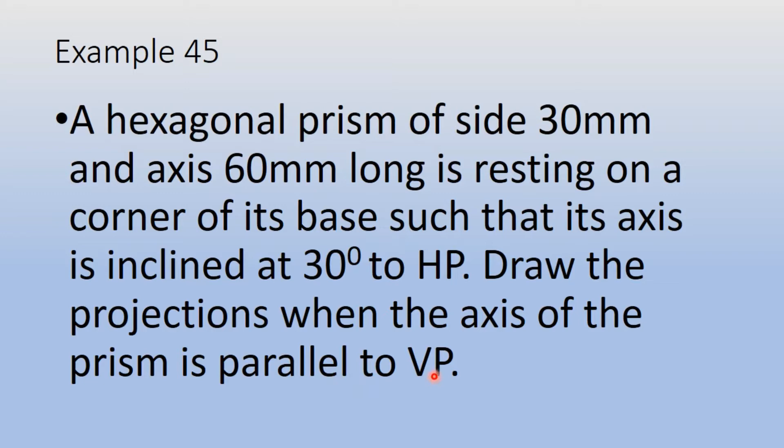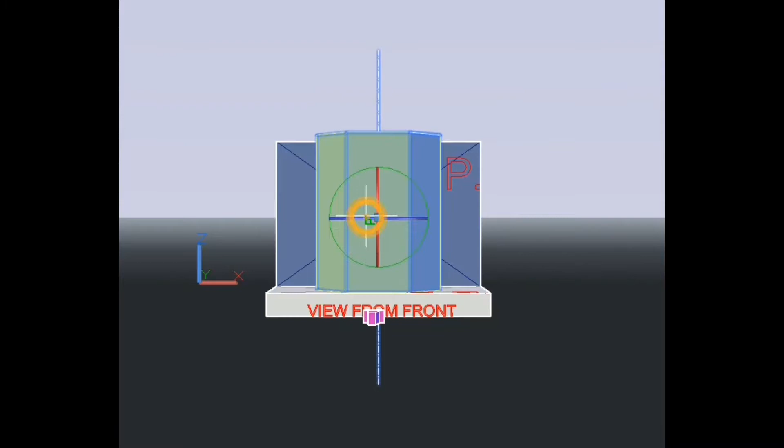So from the previous problem, you see that the hexagonal prism is directly resting on the HP. But here in our question, it is mentioned that it is resting on its corner. So now you can see that I am holding the corner of this hexagonal prism. Just wait a minute. Now you see here at the bottom, I am holding one corner. A corner is a point where two edges meet.

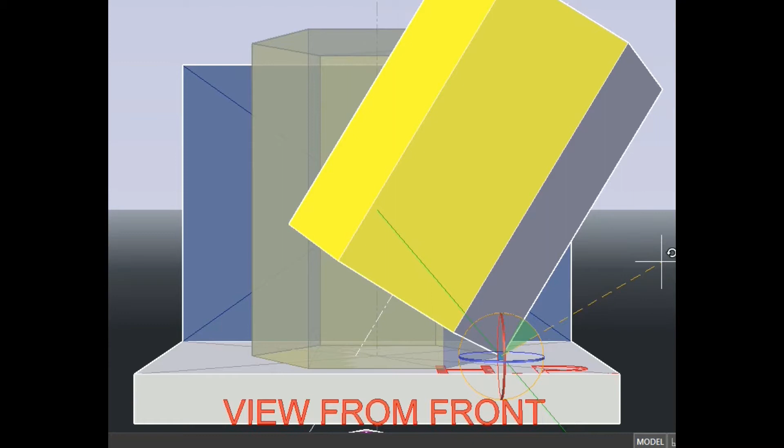So with this corner stationary, I will rotate the hexagonal prism. Now you see that the corner is resting on the HP, but I am just rotating the whole solid. But the corner is on the HP itself. So in any way, the axis is parallel to VP. So let us say this is the inclination angle given in the question. As it is given 30, I will make it somewhat more slope here. Just wait a minute.

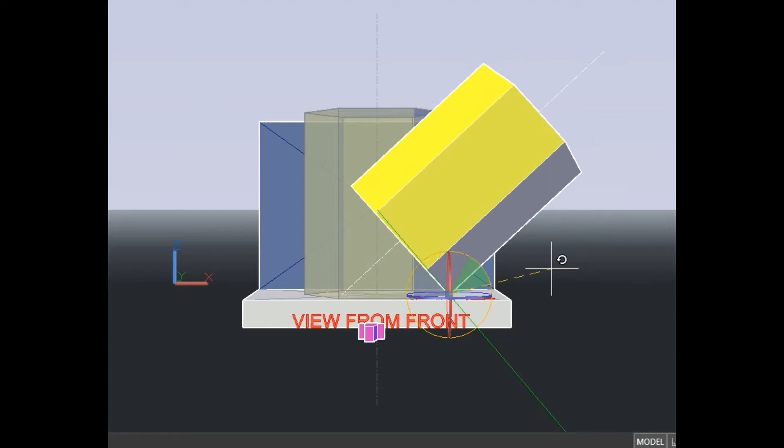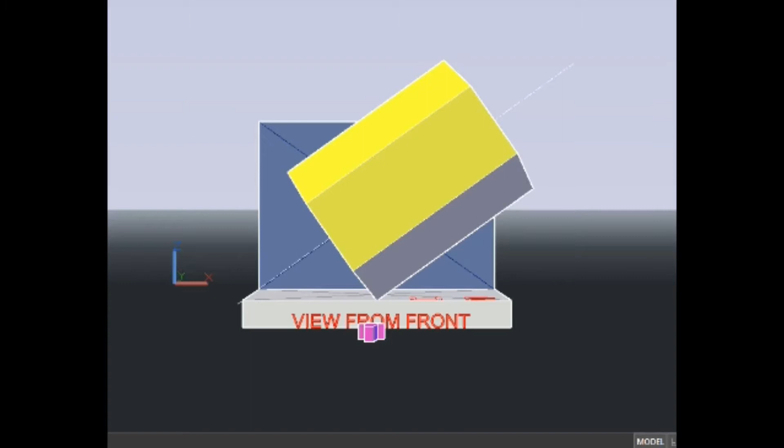So let us say this is the 30 degree angle, and now you can see that it is going beyond the first quadrant. I can bring that back to first quadrant. It's not required, but actually for understanding purpose. Now you see that in your front view there will be three rectangles which are visible. It's very easy, but they are inclined to the HP. And from the top view, you will find that there will be two hexagons, but one will be completely visible.

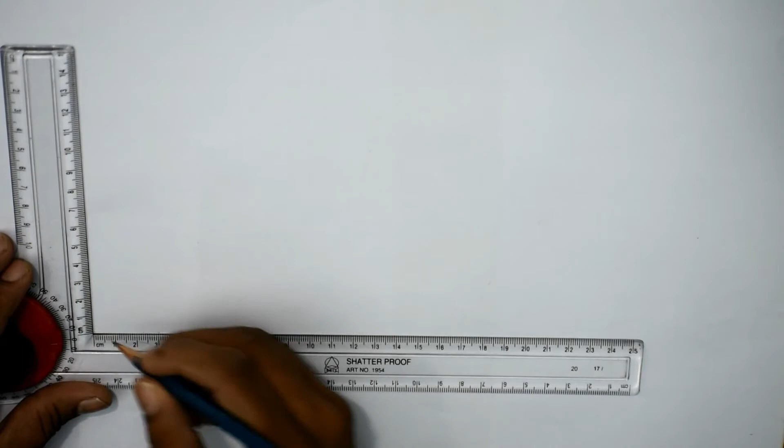So as we have seen that it is inclined to the horizontal plane, but we will first assume that it is resting on its base on HP. Which means that we will get a top view as hexagon. Now I will use 2H pencil here because this is not part of your solution. This is just our assumption to get the dimensions of the main diagram. This line will be very light.

If you don't understand this, you can draw the hexagon as we did in the question number 42 by using the protractor scale. But I recommend you use this because it's very time saving. There you go. We have got all the sides again with the 2H pencil.

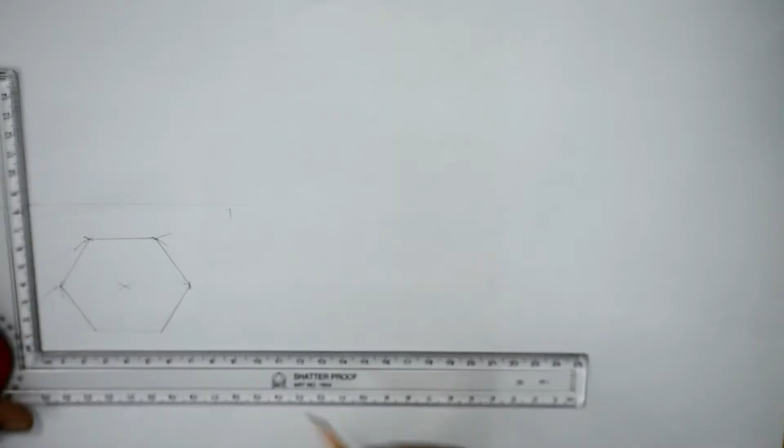So this completes our top view of assumed hexagonal prism. This is your xy plane, and I am projecting all the corners, also the axis line. In this question, it becomes very necessary to mark the points, corner numberings.

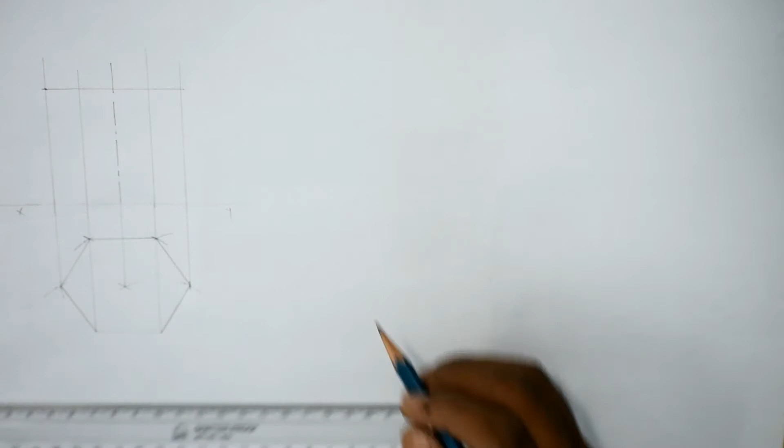So the axis height is 60. So this completes our front view and top view. As for the numbering, 1, you can take 2 here also, but I am taking 2, 3, 4, 5 and 6. So this is 1 dash, 2 dash, 3 dash, 4 dash, 5 dash, 6 dash.

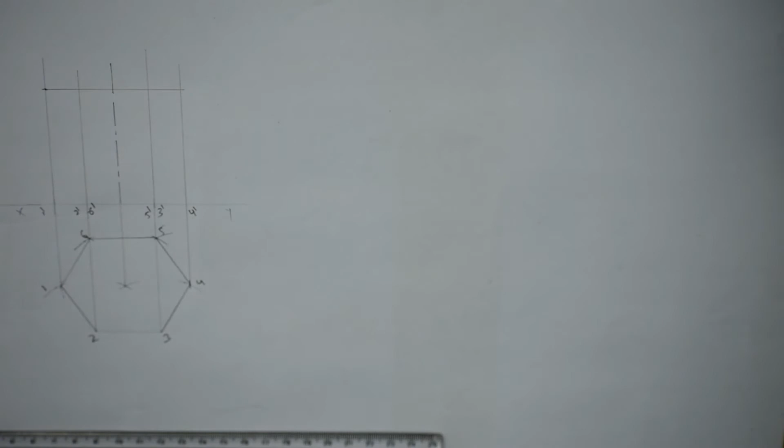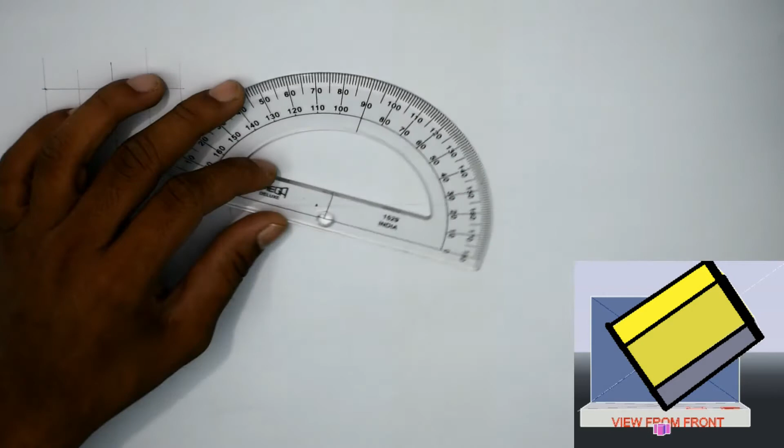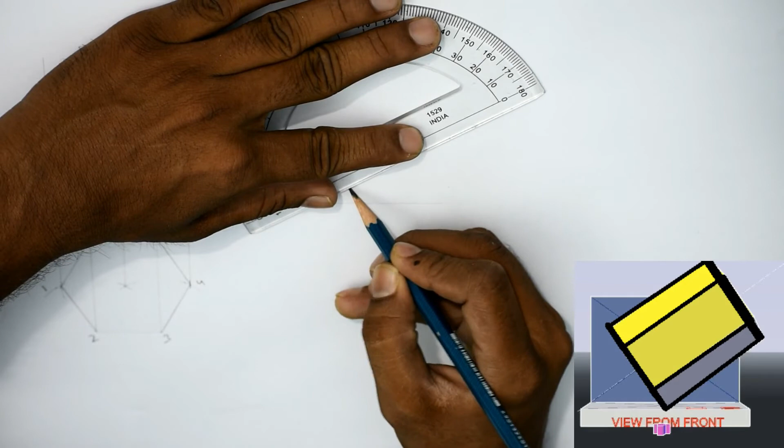Now we will come to our question. In this question, it is mentioned that the axis line is inclined at 30 degree to the horizontal plane. So I am marking one point here, somewhere here. Now I will take the angle of 30 degree. We'll just draw the axis line first. So our beautiful axis line is completed.

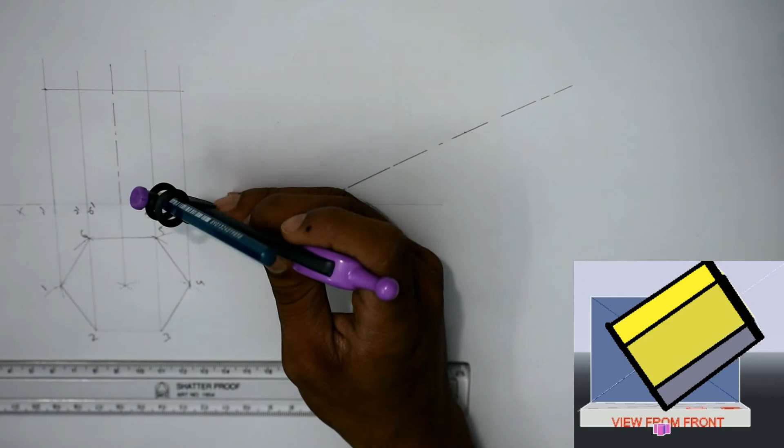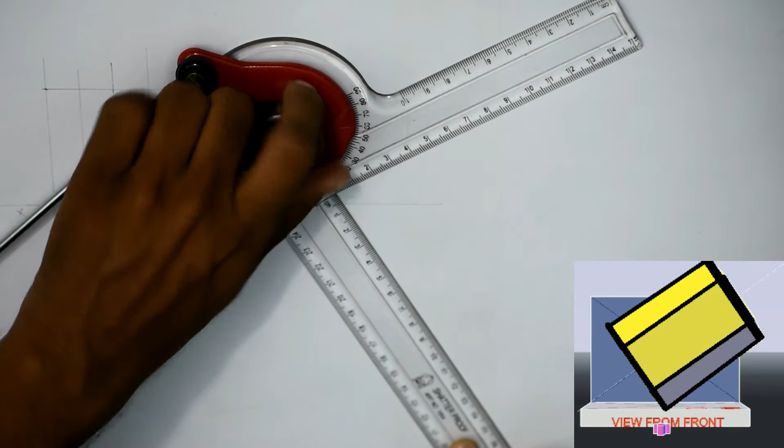Now I have to tilt this figure aligned with this axis. For that reason, as you can see here, you will get around 60. You can measure from here also, from this end to this end. Yes, it is 60. So our base is 60. So we have to make sure that it is aligned first. That is, the drafter is now making an angle of 30 degree with the HP, and now as we go along, we have to just adjust.

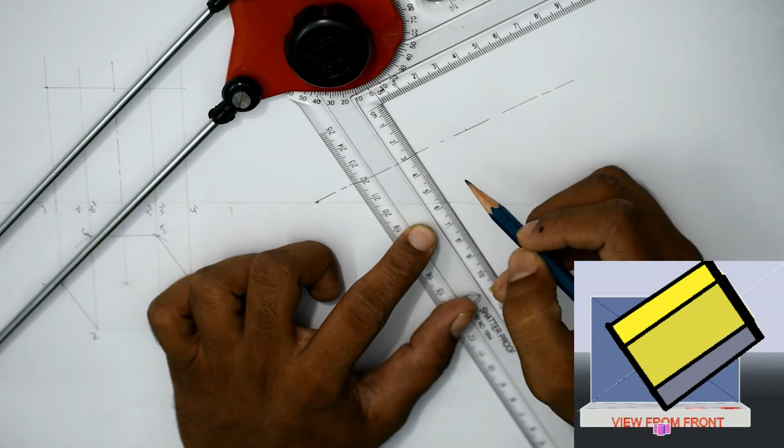If you get this line, you will see that almost your diagram will get finished. See that the 60 mm line is touching the horizontal plane and 30 mm line is touching the axis line, which means you will have 30 mm portion here, 30 mm portion here. Now I will take the HB pencil itself, because this is my final answer, final front view, and I am taking 60 mm directly here.

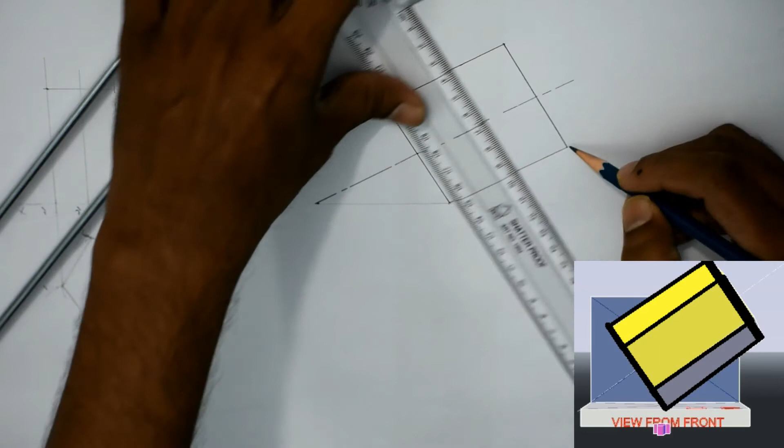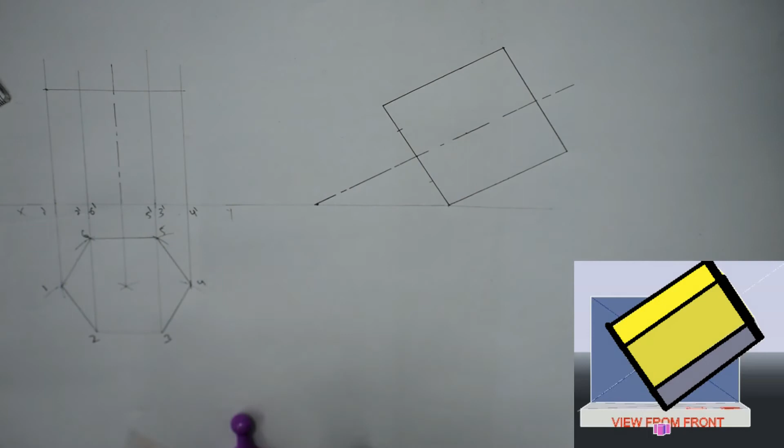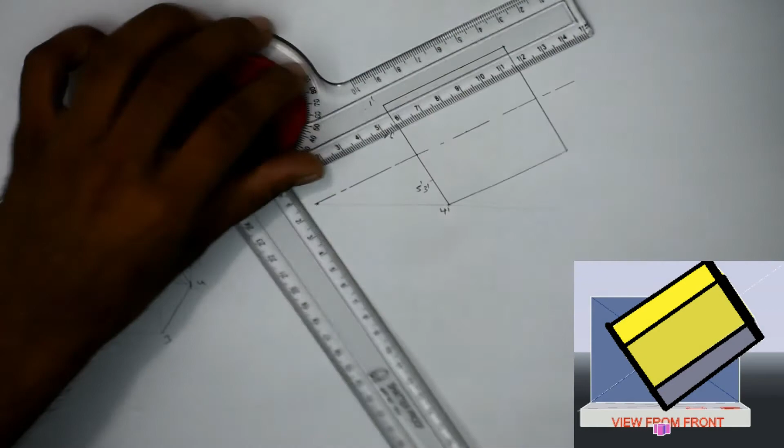Now I will mark these points. As this is symmetrical, these two distances will be same here and here. And observe that as this is 4 dash point and this point has been tilted touching the HP, this I am marking as 4 dash. Then this point becomes 5 dash and 3 dash. This point becomes 2 dash and 6 dash. This is 1 dash. As you can see here, 1 dash will come here. This is our final front view.

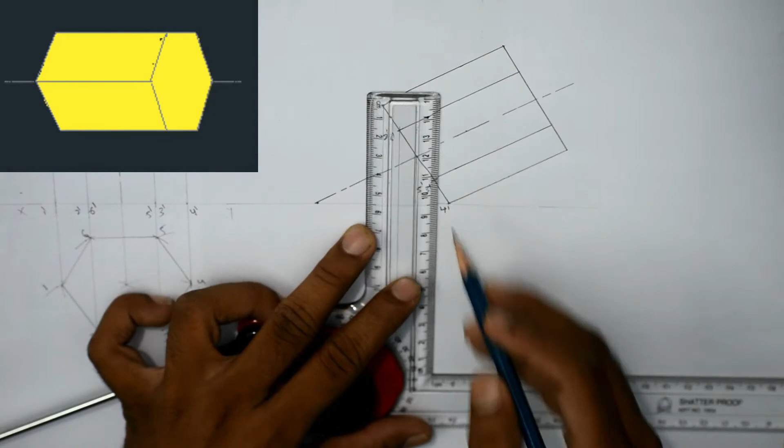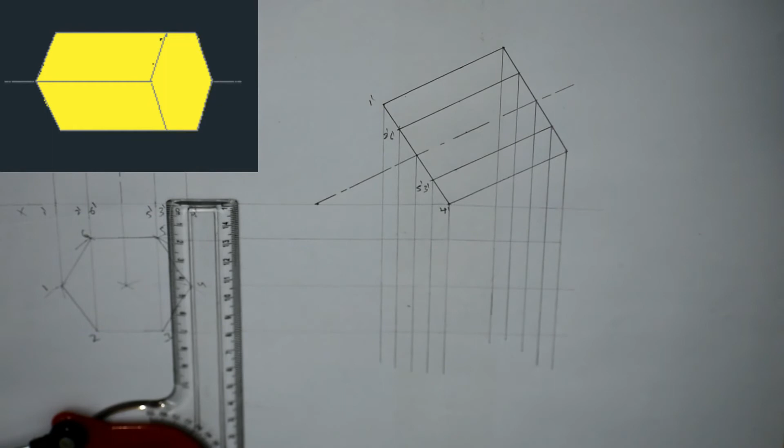Now to get the top view, we need to project the lines, again using the 2H pencil. Taking projection lines from each and every point. From the top view also. From this point also. So there are so many lines, but as we always do, we will match points and it will become easier.

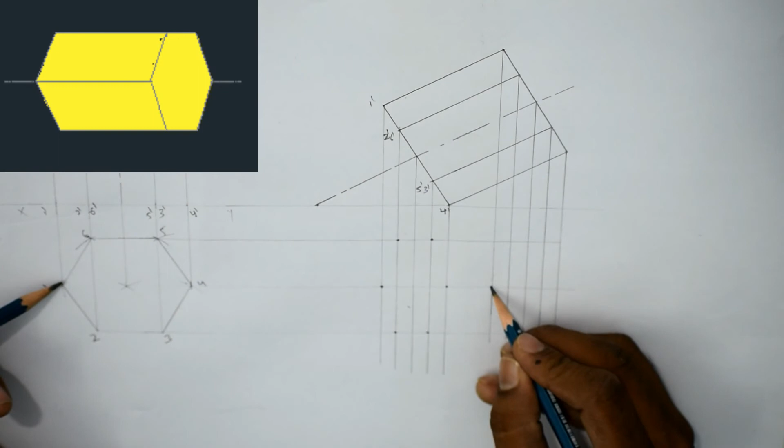So you can see that point number 1 in this top view is here, point 1 dash is here. So when we match, we'll get a point here, and second point is here, 2 dash is here, so we'll get one more point here. 3 is here, 3 dash is here, so we'll get one point here. 4 is here, and 4 dash, one more point here. 5 dash, 6 dash. So this completes, and in this same way you have to complete this also. 1, 2, 3, 4, 5, 6.

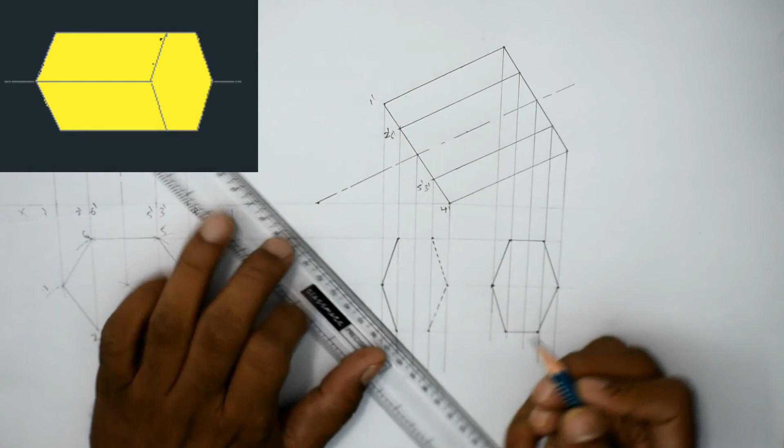As you can see here in this top view, this portion will be visible, this contracted hexagon will be visible. So I will first darken this with the HB pencil. This portion is visible from the top, that is why I am darkening. But these edges will not be visible from the top, that is why these would come in the hidden lines. And as it is a hexagonal prism, this line will be visible, this line is visible.

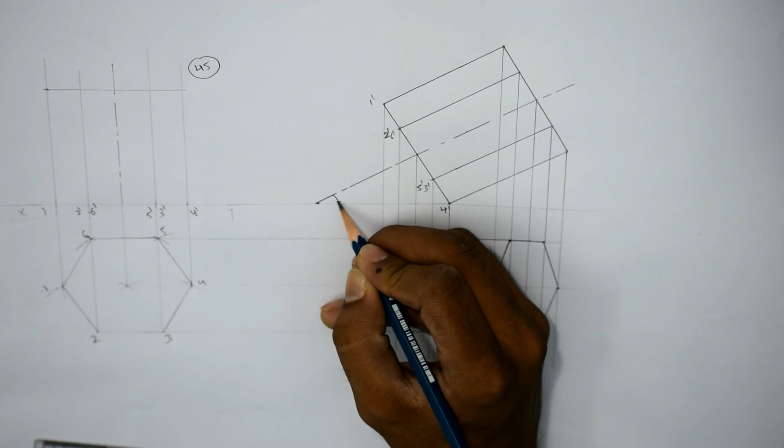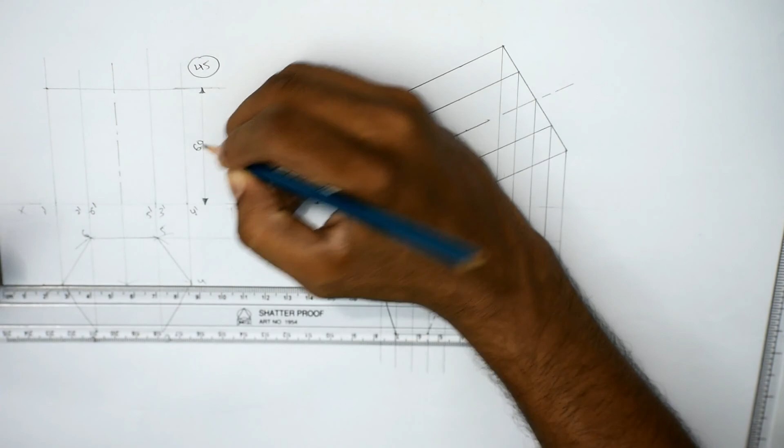So with this we complete our exercise number 45. But we need to dimension, and the most important dimensioning here is this angle, which is given as 30 degree to the HP, and the other things, the axis height, sixty.

This is the final solution of your hexagonal prism inclined to HP, which is resting on one of its corners. So this was our assumption that it is directly standing on the HP, and one of the faces was parallel to VP. So this was the assumption, and we have tilted this because it was mentioned in the question that it is inclined at 30 degree to HP. So this corner is resting on the HP.